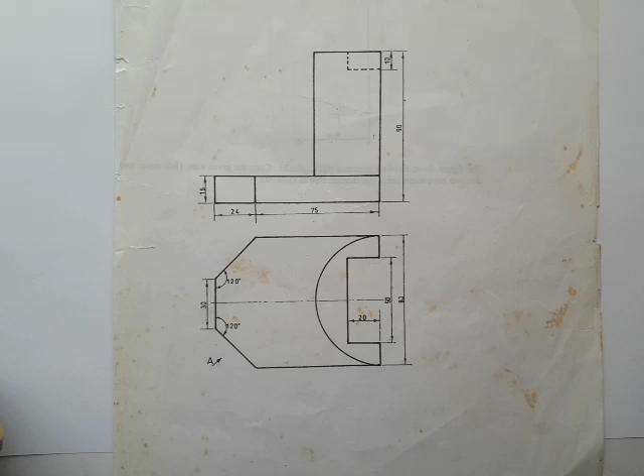Hello guys. Now I found out most students usually have problems with drawing half circles in isometric. In other words, half isometric circles, such as this one. Not just that, especially when the circle is placed at the edge, not at the center or the middle of the drawing. When it is placed at the edge, it becomes a little bit more difficult for students to draw.

But the truth of the matter is, this is very, very easy, and there is no problem at all. So what I'm going to do is to show you how to go about this step by step. However, if you are new to this channel, you might want to go see Introduction to Isometric, because there are some things I explained there in detail that I'm not going to dwell on that much in this video.

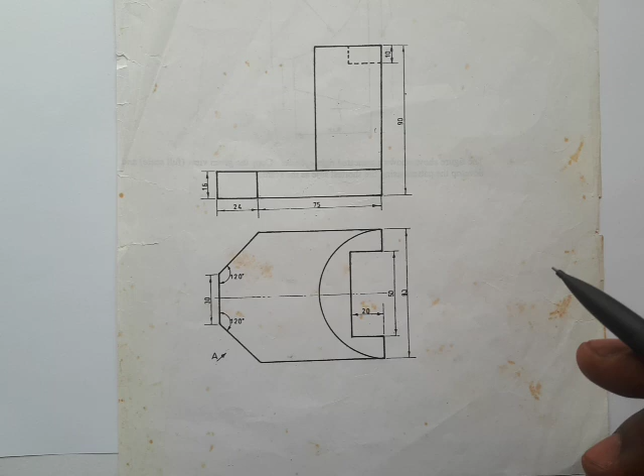Now, if you have checked out my previous video, you will discover that I always use the box method, which happens to be the easiest method to project isometric drawings. So the box method, the process or how you should go about that is you're going to have to look for the total height, the length to the right and the length to the left. Then you project the box with it.

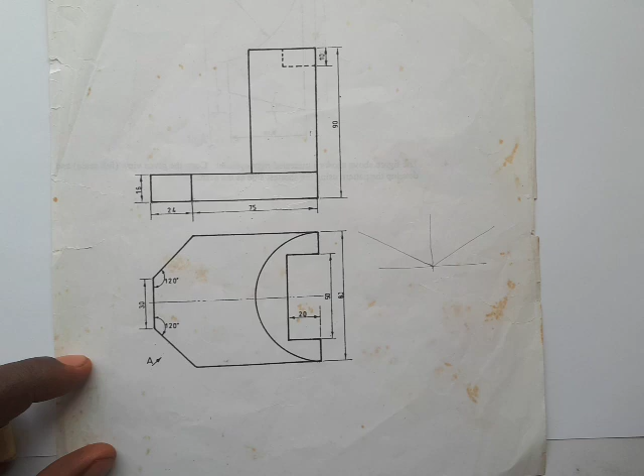What I'm talking about is this. You know, when you're drawing an isometric, you have a horizontal line, you have a vertical line, you have a line receded to the right 30 degrees and another one to the left 30 degrees. By the way, this is an old question I found somewhere and I just decided to share with you. All right, so now you're going to look for the total dimension to the right, total dimension to the left, and the total height. Then you use the whole of that to draw the box that will contain this drawing.

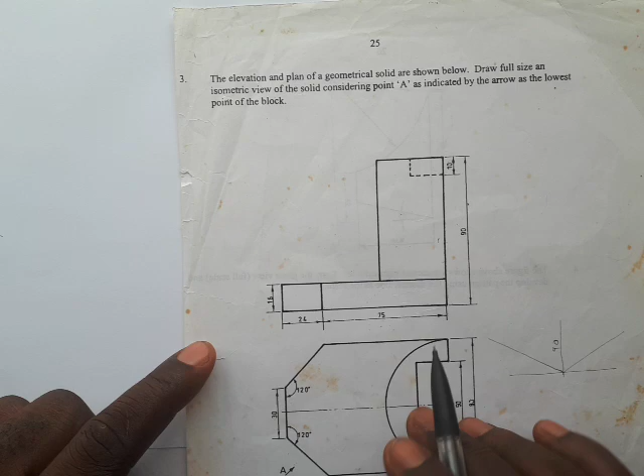Now from this drawing, we could see here that the total height here is 90. So that means this line will be 90. Now let us look at the total length. Remember, we're asked to draw this considering point A, as indicated by the arrow, as the lowest point of the block. All right, so this is going to be the lowest. So from this point to this point here is what is going to take this receding line here.

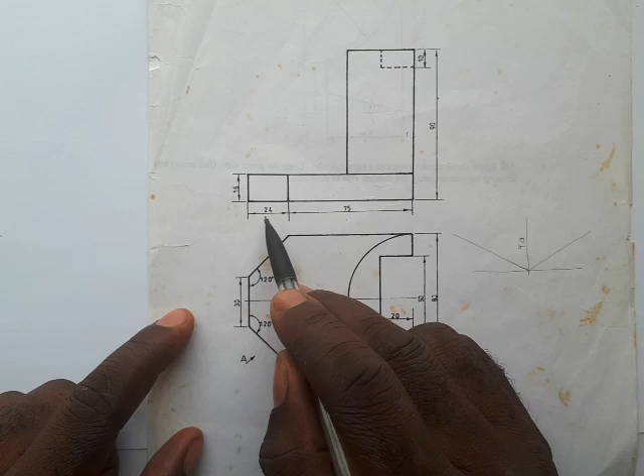So what is the dimension? So from here we have 75 plus 24. That's 99. So this is going to be 99 millimeters. That's 9.9 cm. Then let's find the length to this other side. That would be this length here. So from here we could see that this is 80.

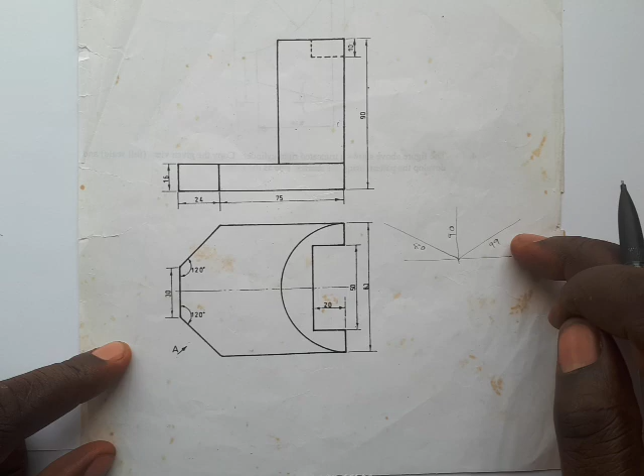So this is 80. So what I want to do is draw a box that is 90 by 99 by 80. So I will do that off recording. And if you want to learn how to do that, go check my previous videos. You will see exactly how to go about that.

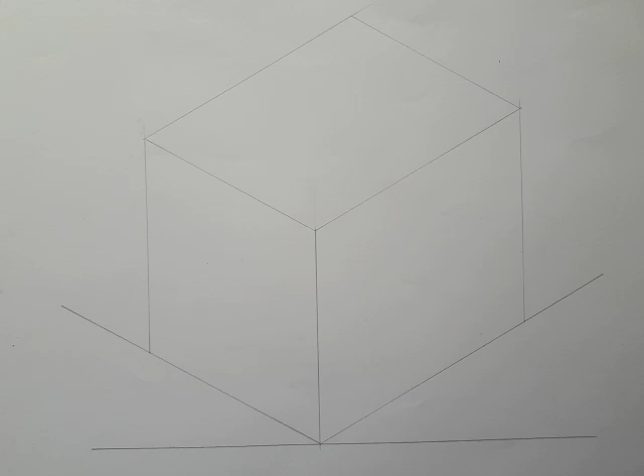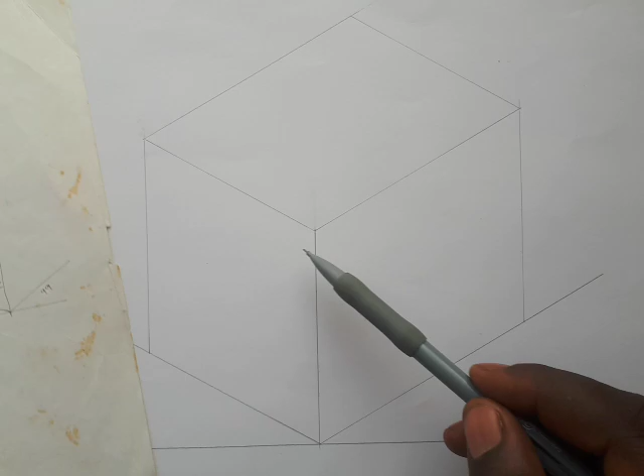Okay, so here we have the isometric box. Remember how I got it. The whole of this height you're looking at, 90. This dimension to the right, all of it 99. And this, all of it to the left, is 80. So I'm just going to project this inside. Now my focus will be more on this area, although I'm going to show you how I got the other part, but I would want you to focus your attention when I get to this area.

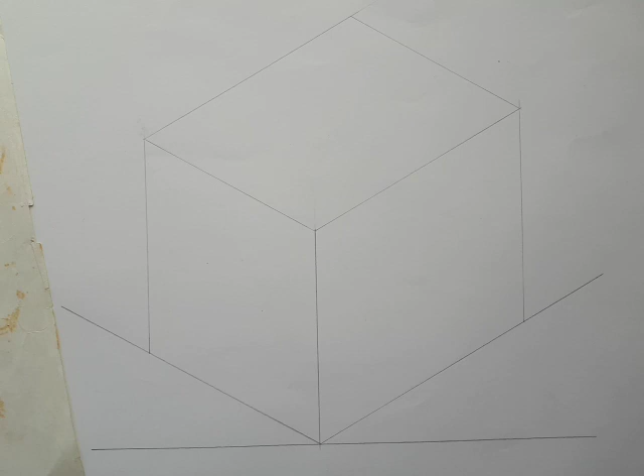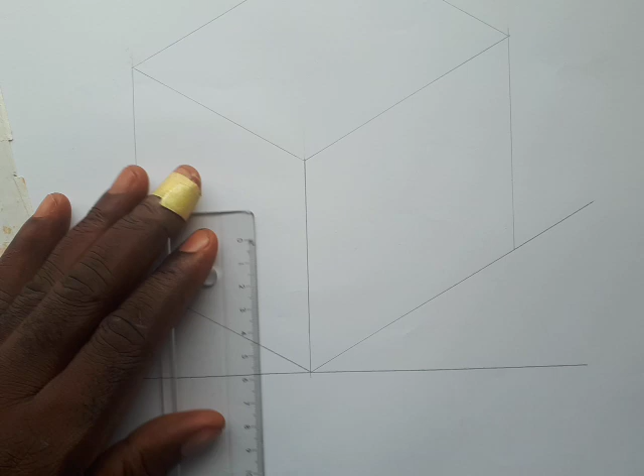Okay, so from here we know the height here, the dimension is 16. So we're going to measure 16 here. I hope you can see that very clearly. Take it up. Okay, so this is 16. This is 5. This is 15, and this is 16. So I'm just going to measure. This is 0. So that's it. So I'm going to transfer.

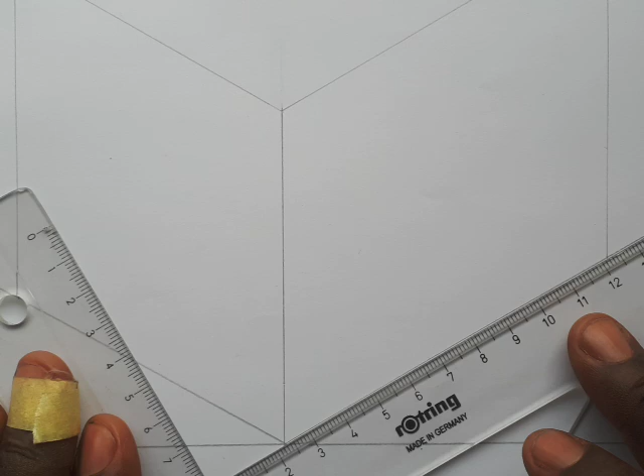Now remember, this box, everything you see here are thin lines, not thick lines. So when you're projecting your box, make sure you use thin lines. All right, so I measured 16 here, so I'm just going to transfer lines from here to where I measured 16 and draw thin, very faint lines, and stop here. Then do the same thing here, transfer lines from here to 16.

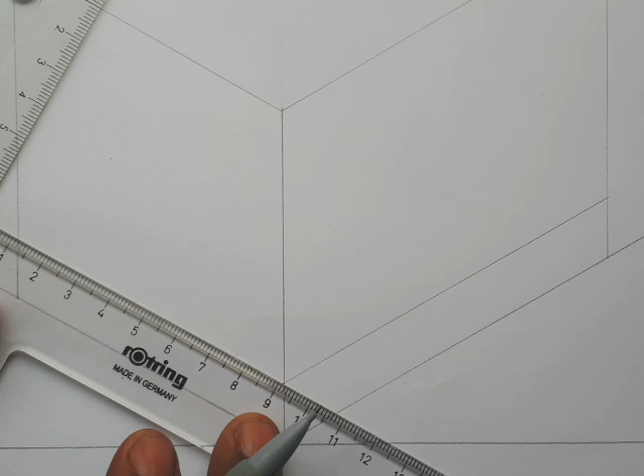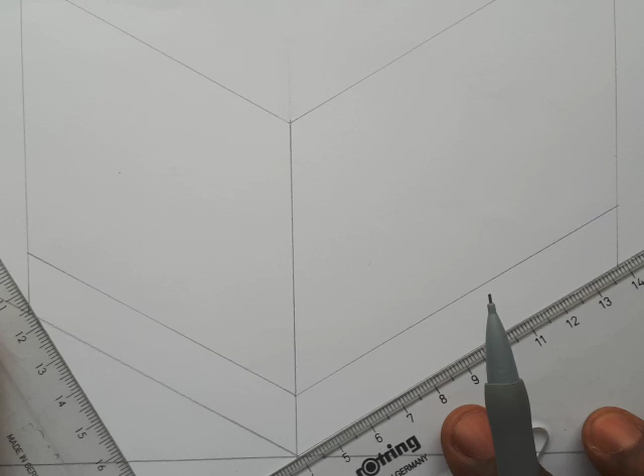This point here, and draw faint lines for now. All right, so now I'm going to transfer this line because I will need the back to project this part. So I'm going to transfer this line here. So align your set square properly and transfer lines to this point here, and draw lines all the way, stop somewhere there.

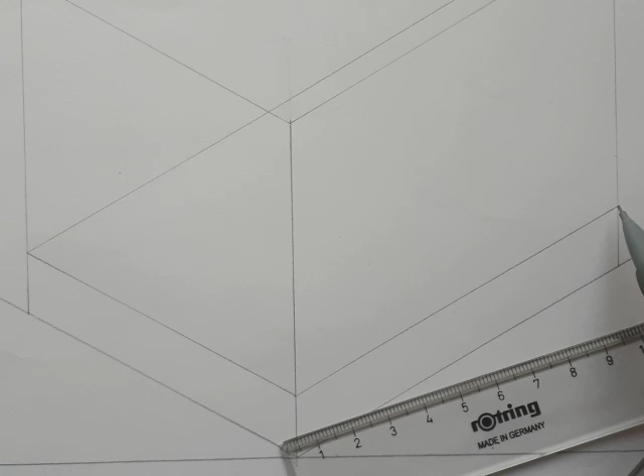And there are two ways you can go about this. You know, this is already 9.9, so it's either you measure 9.9 here, connect it, or just simply transfer this line to this point and connect. I hope that's clear. Thin lines. So align your set square. I'm going to use this method and transfer to this point here and draw thin

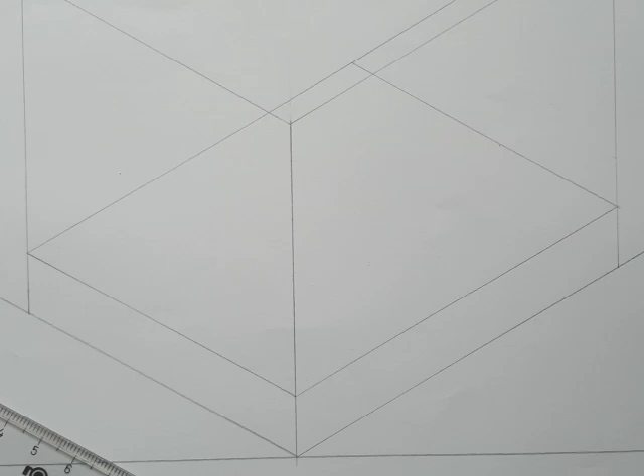lines. Good. Now do not confuse this line with the one on the top. Okay, this is for the top, while this one is for the base. Talking about this part here, this level. All right, so let's move on. Now let me start with this side. Now you see this is half a circle, something like this.

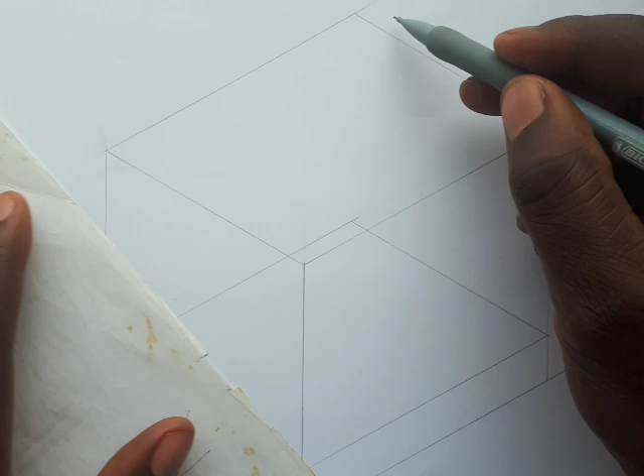Now like I said, go check out previous videos on introduction to isometric. I laid more emphasis on how to draw isometric circles and I explained in detail. However, in order for you to draw a circle in isometric, you need a rhombus. A rhombus is an equivalent of a square when viewed perpendicularly. It's an equivalent of a square.

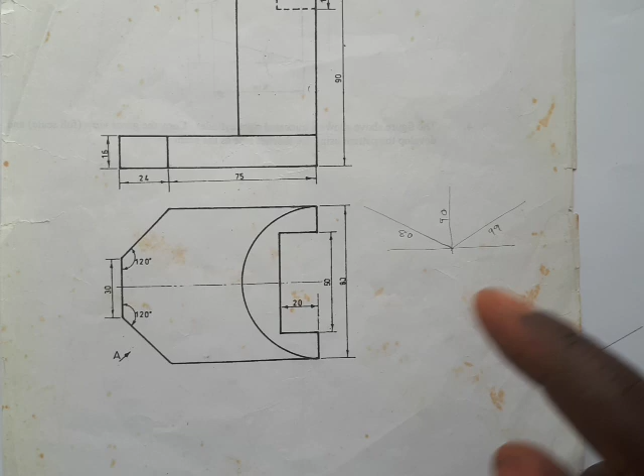So you need a rhombus to draw an isometric circle, just like you might need a square to draw a circle. You don't actually need a square to draw a circle. You can draw a circle with your pair of compasses and all of that, but you could also draw a circle using a square. So you need a rhombus to draw an isometric circle. But in this case, we have half a circle. So you see half of the circle is on this part.

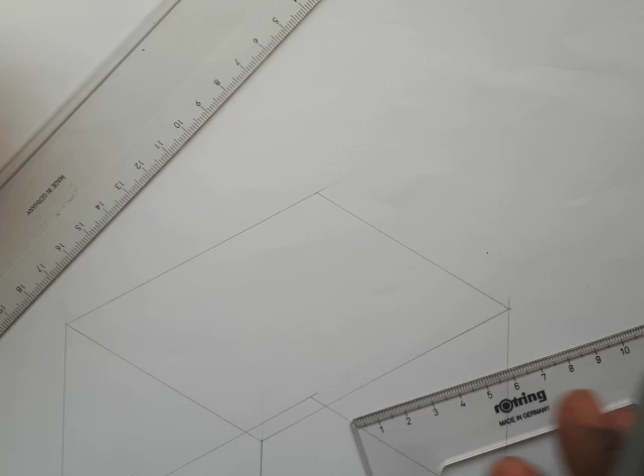Now the question is, how do I draw a rhombus here when I have the circle here? Very simple. You're going to project half length of the rhombus inside the drawing and half length of the rhombus outside. You do it for both the top and the bottom. I hope that's clear. So let us proceed. You're going to extend this line with thin lines a little bit, like this. Extend this line a little bit.

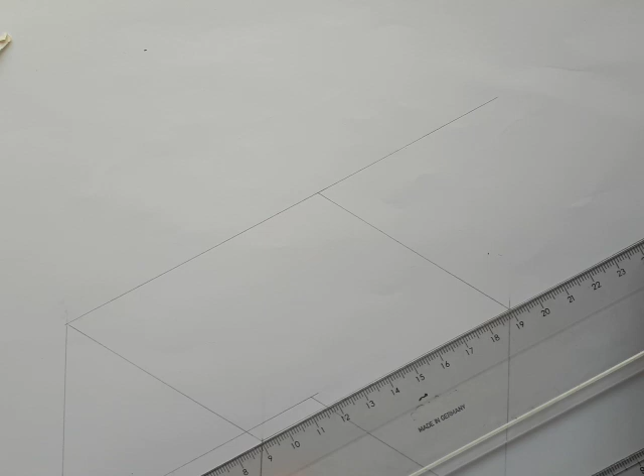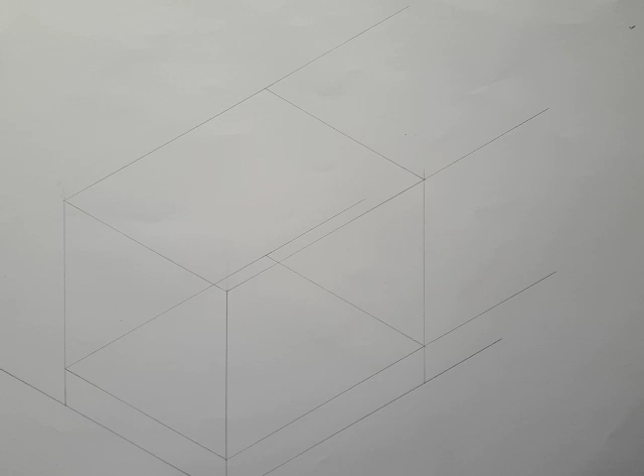All right, just follow me. Now I'm going to do the same as I did for the top for the bottom as well. So I will extend both lines, this line and this line. Now do not forget, these are all thin lines. So I extended this. Take your eyes off this. In fact, let me erase this one so you don't confuse this line, the base and the top.

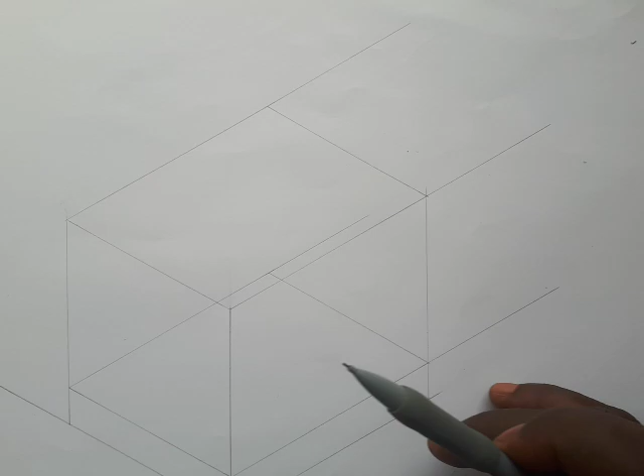Now the question is, what is the diameter of the circle? The diameter is 80, that's this exact size here. So for you to draw a circle of diameter 80, you need a rhombus of 80 by 80. So you're going to draw a rhombus 80, taking here as the center, or rather the diameter of the circle. So the circle is going to go like this. But all we need is half of the circle for the top and half for the bottom. Part of the circle is not going to show up at the bottom. Don't worry, when we get there you will understand.

So if the diameter of the circle is 80 and the length of the rhombus has to be 80, we're going to take 40 to the right and 40 to the left. That would be the measurement, do you understand? So now this is 40 here at the center. I hope you can see this. We have 40 at the center, we have 80 here. So I'm going to needle on 80 and on 0. From this point to this point is 80, this point here being the middle. So I'll do the same thing for the top.

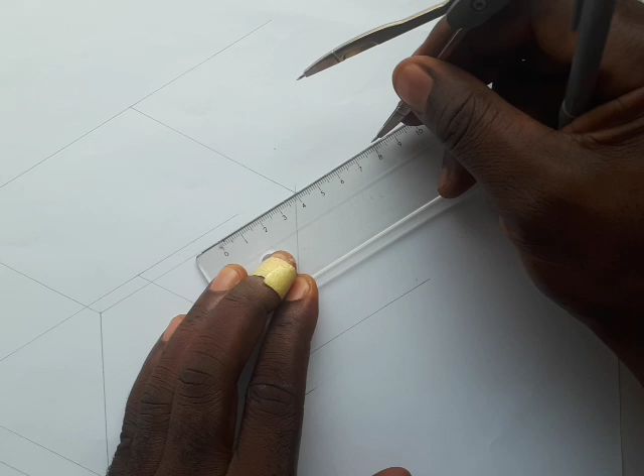Now remember, take your eyes off this line. I'm making use of this one for now. So I'm going to place my 40 at the center there. Measure to the left, that's 0, and to the right, that's 80. 40 being the center. I hope that's clear. We're going to do the same thing for the bottom, but let me finish the top. Now what you're going to do next is transfer lines like this. So align your set square with this line here.

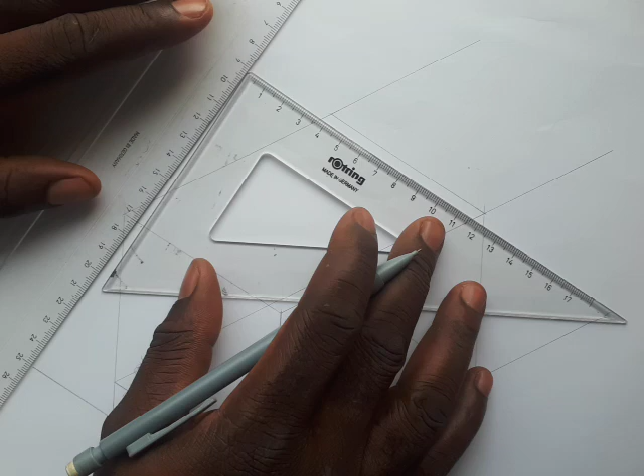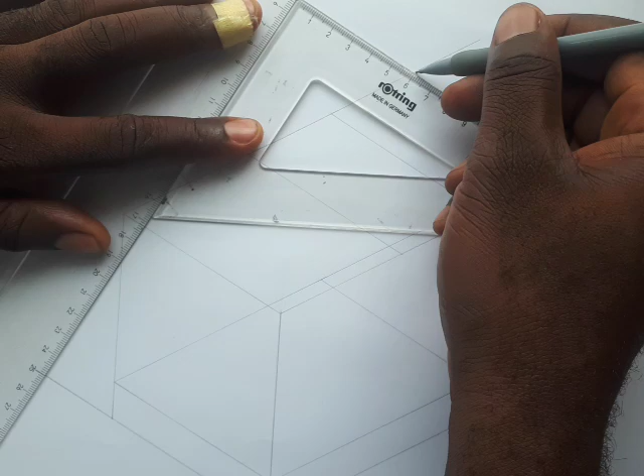Transfer lines to where you measured 40. That's this point here, and draw until it touches this other point here, 40. So there's no point even measuring this 40 here, because once you transfer lines it gives you the same dimension at the end of the day. So transfer to this point here where you measured 80. So that's it. So from here to this point here is 80, and from this point to this point here is 80 for the top.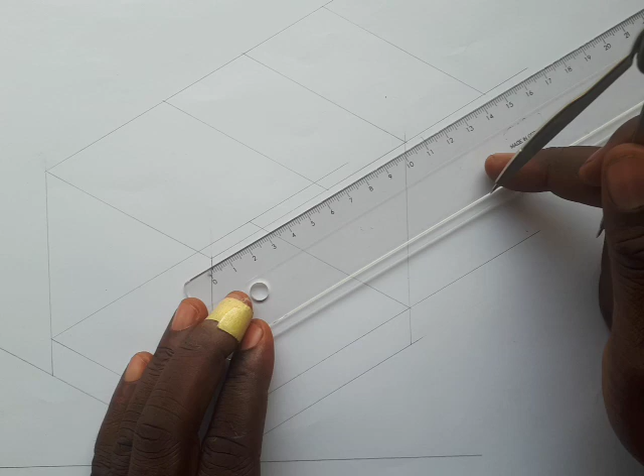Now we're going to do the same thing for the bottom. How? You place your ruler like this. So you measure. This is my 40 at this point here. See this? 40. I'll measure 80. That's my 80, and this is 0. That gives me 80. I hope that's clear. So I'll do the same thing for the bottom, for this other side. So I'm going to place my 40 here. Okay, and this is my 0, 40, and 80.

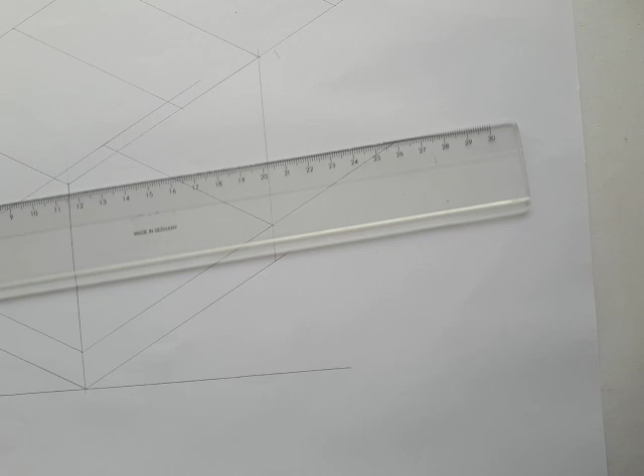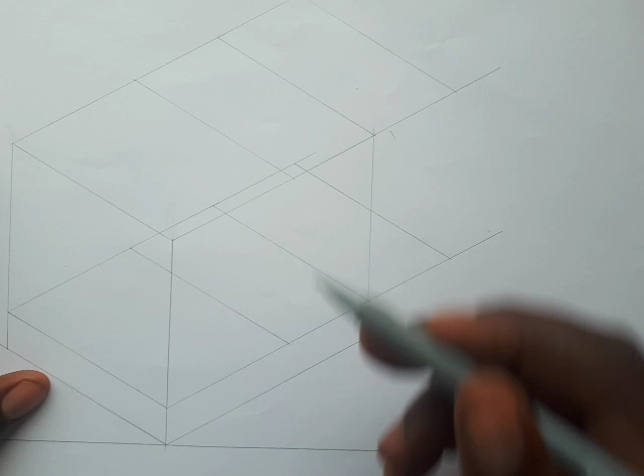All right. So I'm going to connect them. It's either you connect them or you transfer lines, but I just love to transfer my lines. So like I also said, you could measure just one side only. Transfer your lines. It will give you the same thing at the end of the day. So this is my 0, this is my 40, and this is my 80. So I'll transfer lines all the way here. Okay, and that's it. So for clarity purpose, I'm going to erase this extension so you see exactly what's going on here. Okay, so here we go. I hope you haven't blinked just yet.

Just follow me. All right, now let me focus on the top first. Then I'll do the same thing for the bottom. Now you know how to draw an isometric circle, right? So the first thing you do is you draw the what? The diagonal, the longest diagonal. So this is the rhombus. This is the longest diagonal. This is the shortest. Don't join the shortest. Join the what? The longest. So I'm going to connect this with thin lines. I'm still on thin lines to this point here. All right. I'll do the same thing for the bottom. Okay. I hope you haven't taken your eyes off the whole process.

Good. Now, I have located the center of this side 80. You know this is also 80. So what I'm going to do is I'm going to locate the center. I only need half of the circle, so I'm not going to bother myself with the other side because I don't need it. I don't need this side. I don't need to draw the circle out. Just the inside only. So I need to locate the half of this 80 and also the half of this 80. So a simple way to do that, just place your ruler. This should give you 80 on the dot.

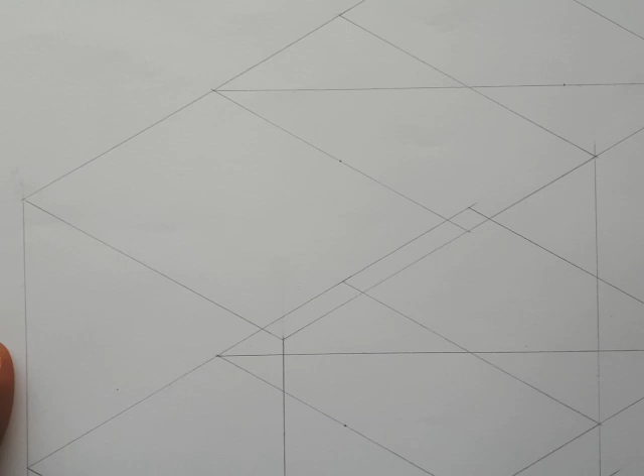And the center is what? 40. So I need this point here. So note it. And also do the same here for the bottom. This is 80. All right. And the middle here is what? 40, dot. And just rest. So let me zoom in a little bit so you see the next step. All right. So what we're going to do next is we'll start drawing the circle.

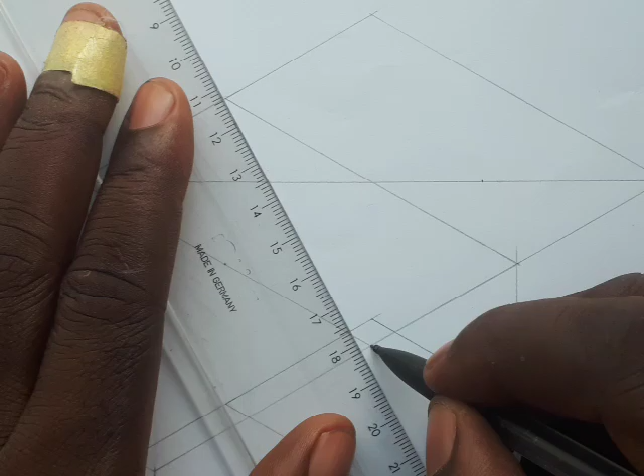Now before we do that, we need to get a point. So you can choose either of these points, this corner here, or this corner here. All right. So what do you do? You connect it to the center where you measured 80. I mean the point 40. What you're actually looking for is a point on this line. So this is how you go about it. So now, please do not confuse this base with the top. Focus on the top. Take your eyes off the base for now. So this is the corner. So connect it to this point here.

All right, but I'm not going to draw the line. If you like, you can draw the line, no problem. But I'm not going to draw the entire line because I don't want this whole drawing to be crowded with lines. So I'm just going to focus on this part. All I need is this point here where it cuts this diagonal. I'm supposed to actually draw this line, but I'm not going to draw the whole of the line. I'm just going to draw this part because this is where I need. All right, okay, that's it.

Now I'll do the same thing for the bottom here. All right, I'm going to connect this to this half. Now do not make the mistake of joining it to this point here, because this is this other side at the back. So you connect it to this side, this point here, but there's no point drawing the entire line. Just cut this line at that point, and that's enough. Now needle here at this point of intersection here, stretch to this point here. Sorry.

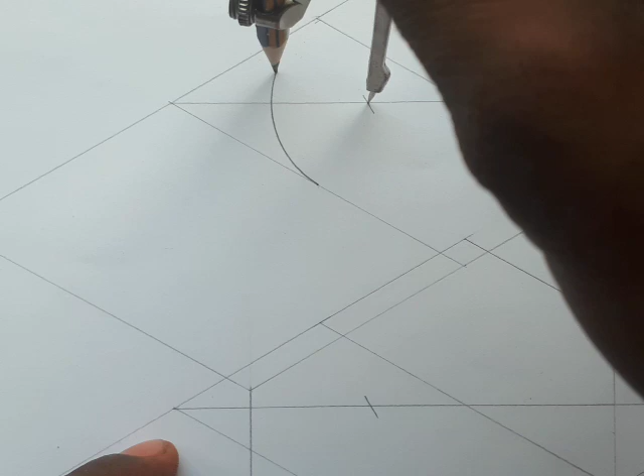Okay, now if it is touching this point, if you have drawn it correctly, it should also touch this point. I hope you can see that. All right, so I'm just going to adjust this properly. So that's just good. Now draw from this point the half to this other half you measured here. Do not exceed these midpoints. So draw a thick line like this. All right, I hope that's clear.

Now look at this base. We'll do the same thing here, but we are going to be very, very careful. So needle at this point. Remember, if it is touching this point here, it should also touch here. But we are only going to stop at the diagonal. We're not going to exceed. Why? Because by the time we are turning, that will be the back of this drawing. This is not a transparent object. It's an opaque object. So we're just going to stop here because we don't need hidden details. You don't draw hidden details in isometric except you are told to do so, but actually you shouldn't do that.

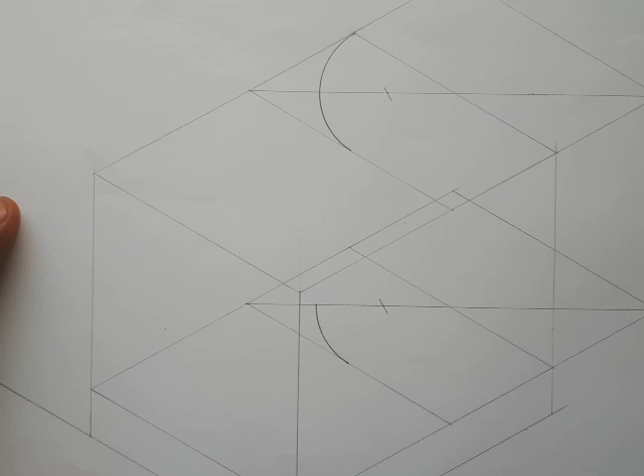So you draw lines from here, arc from here, and stop at this diagonal here. Just stop there. Thick line, stop there. All right, now needle here, this point here, and stretch to this point half, or this other point here half. Okay, so that's it. Now if it is touching that point, it should also touch this point. You see, so you draw lines from here and stop here. Do not exceed the half. Thick lines or thick arcs like that. You see that?

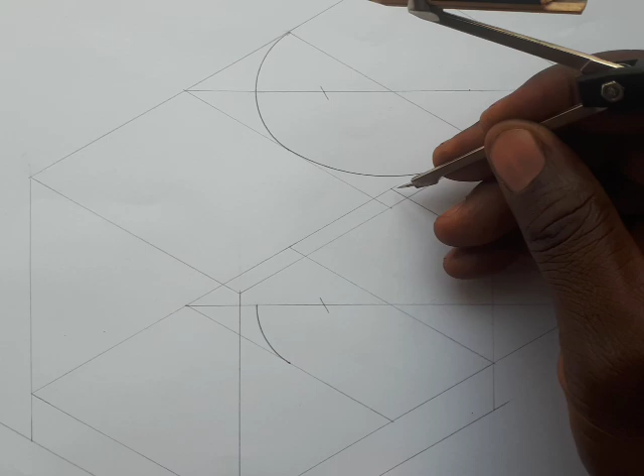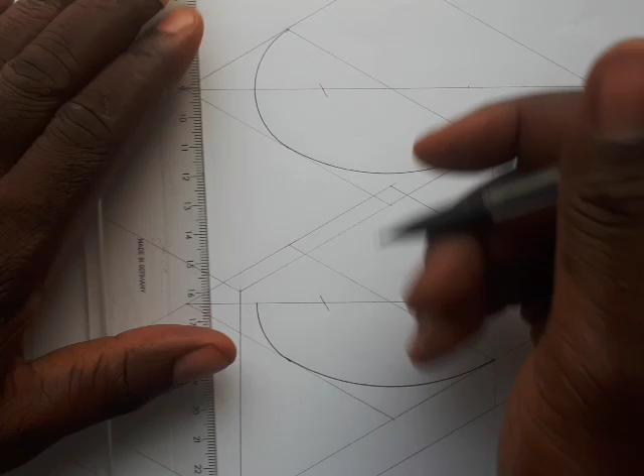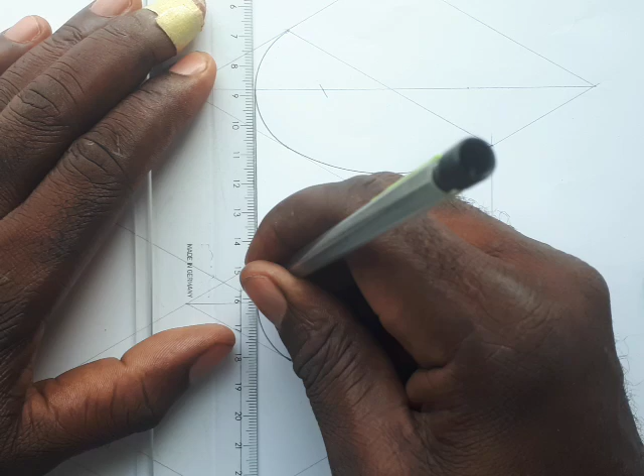All right, now you do the same thing for the bottom. So you needle here. Remember, once again, don't make the mistake of pointing your pair of compasses at this. Don't needle here or this point. It is this point here. You stretch to this point. It should be there already. Now if it is touching that half, it should also touch this half here. So draw the other one with thick arcs like this. Okay, that's it. Now connect this point of intersection with the diagonal with this point of intersection with the diagonal with thick lines. So that's it. We move.

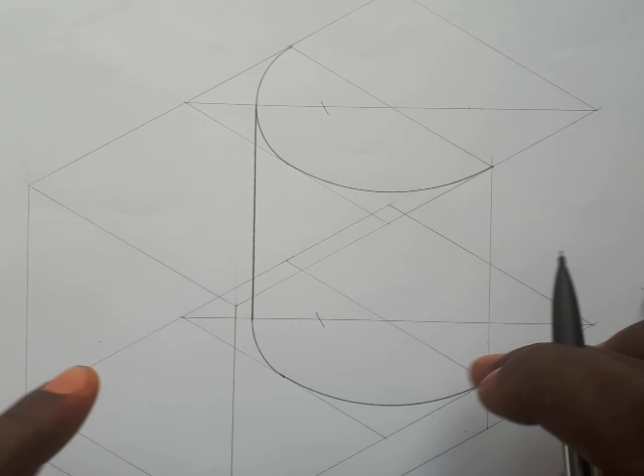Now we're done with the most difficult part, because this part is quite technical, but you can see that it is very, very easy. All right, so let's now complete this part. Now there is something wrong with this drawing. This is actually a NECO question, one of the Nigerian examinations. Looking at this drawing, you can see a hidden detail here, right? What this hidden detail is telling me is that there is an opening here, and this opening has a floor, like a leveled ground here.

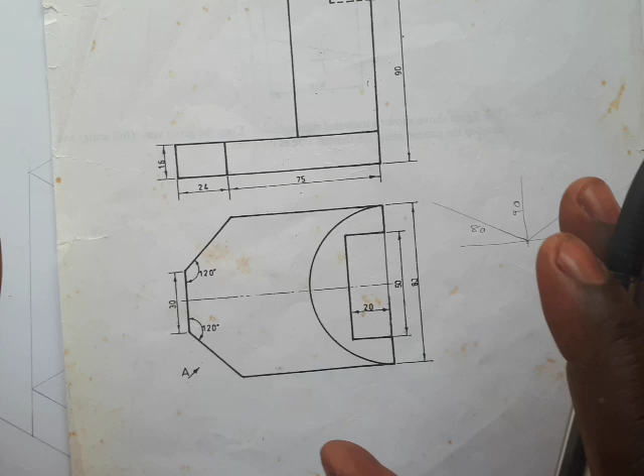So if that's true, it means there's supposed to be a line here. So this drawing wasn't complete, so I'm just going to complete the drawing by adding that line. Actually, it was omitted. All right, so this is how it should look. This is the right plan. So how do I know that? It's because of this part here. Okay, now let us draw this part.

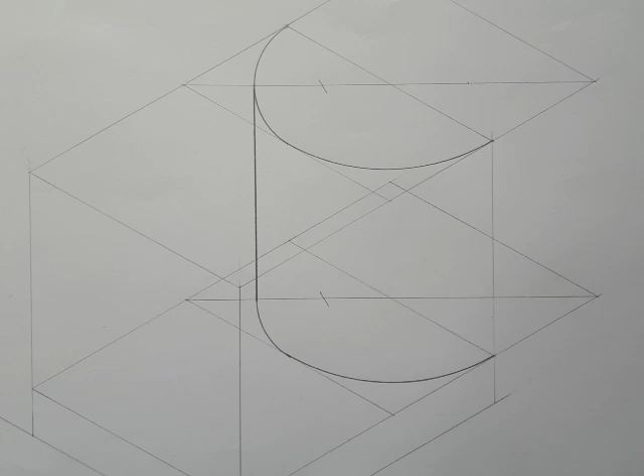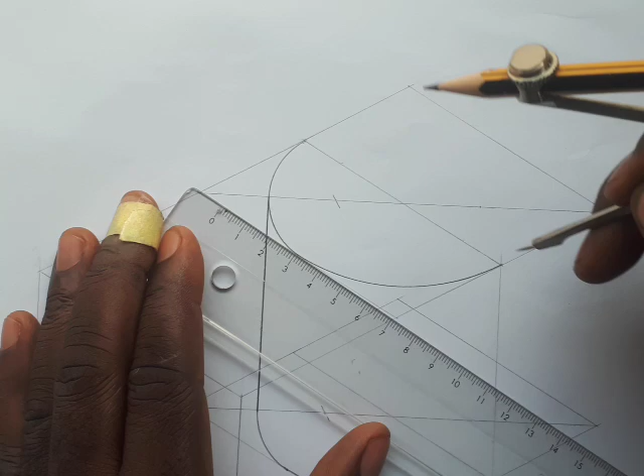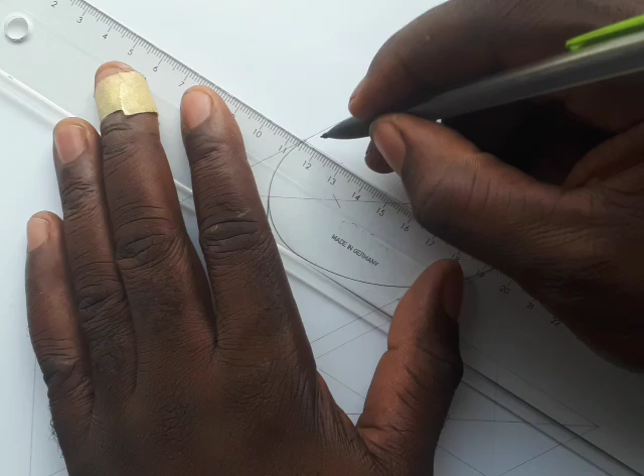Now from here, what do we have as a dimension? You know the entire thing is 80. If you take 50 off 80, you have 30 left. So that means this part here is 15, and this part is 15. That's 30. Okay, so you measure 15. Place your ruler like this. Let me take this as my 0. So this is 1 and this is 1.5. That's 15. So from this point to this point is 15, and from this point to this point is 15. So I am going to draw them with thick lines. 15 here and 15 here. I hope that's clear.

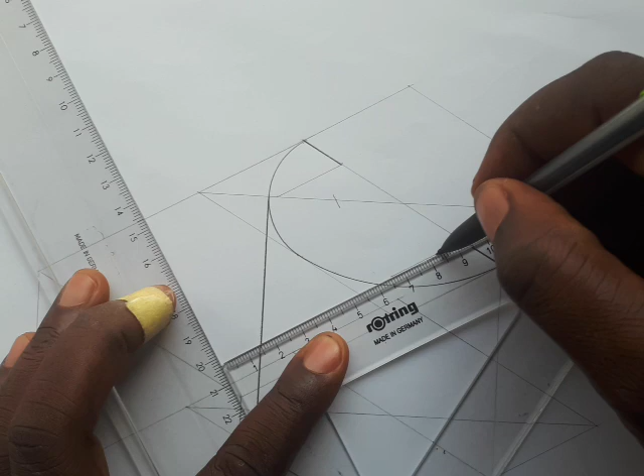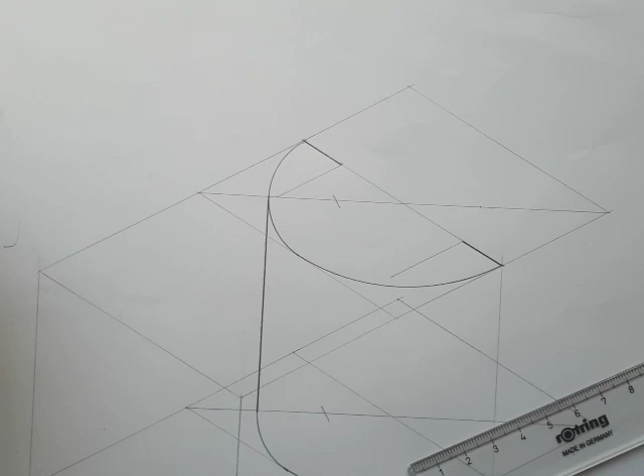The next thing is you transfer lines. So align your set square with this line here and transfer lines to this point 15 here. Draw thin lines for now. Draw thin lines there and thin lines here. I'm going to make them thick later after the measurement. All right, so what is the dimension here? This is 20. So I'm going to measure 20. I don't need to measure on both sides. I can just measure on one and transfer the line. So measure 20 here. So this is 1, 2, 20. For clarity purpose, let me just draw it. Thick lines.

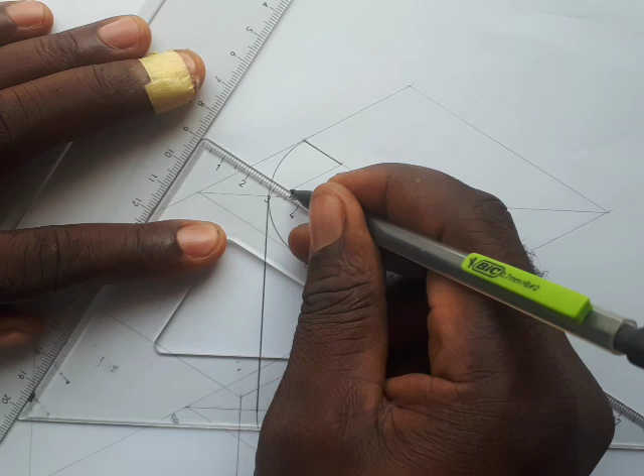So that's 20. So what I'm going to do is transfer lines from here. Align your set square very well. Transfer it to where you measured 20. Then I will draw it until it cuts this other line. Thick line at once. Okay, so that's it. Alright, so I'm going to print this part. Now, like I said, there is a bottom part here. So let's fix that. This dimension here is 10. So I'm going to first of all transfer a vertical line to this point here, a thin line. Let me do that again.

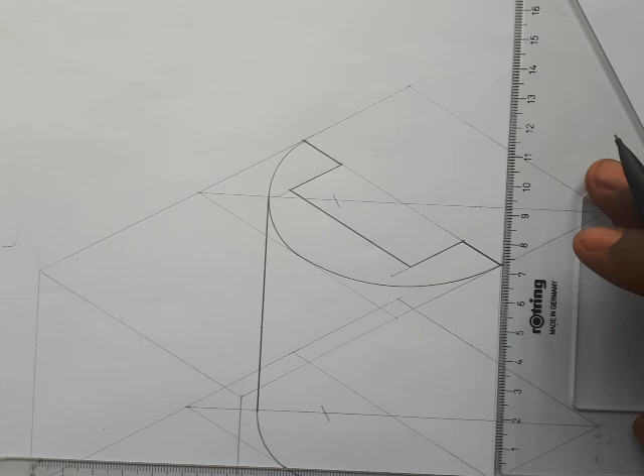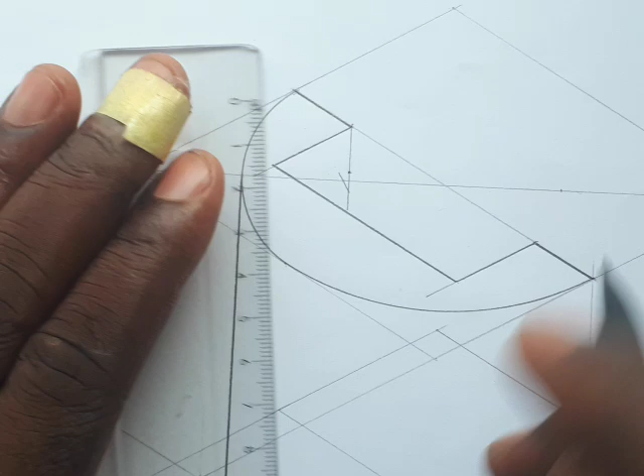Okay, so transfer a vertical line here and draw it down, a thin line. Draw it down like this. Okay. Now what I'm going to do next is I'm going to measure what? 10 on it, because I have it as 10. So you measure 10 on it. That's 1 cm. So that's 10. Okay. Once you're done with that, you can erase the extension. Be careful so you don't, sorry about that. You can erase the extension a little bit.

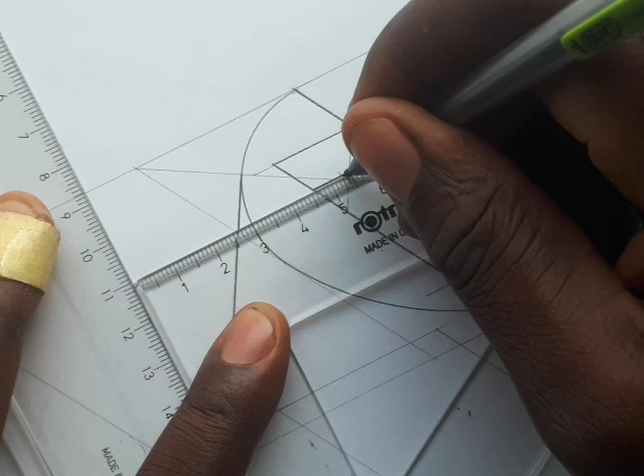Okay, so I'm going to align my set square with this part and transfer to this point here where I measured 10. Okay, and I'll draw until it touches this part here, because like I said, the object is opaque, you can't see the inside. All right, then I will transfer lines from here. Align your set square like this, transfer to this point here, and draw until it touches this point here. Okay, so that's it. Then print this part. So we're done with this part.

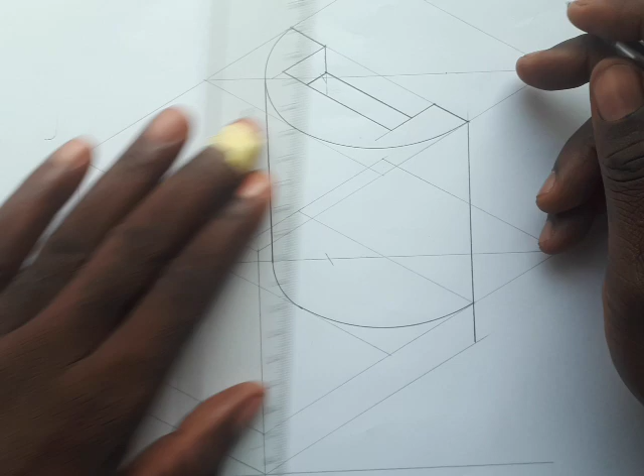All right, so the next thing we're going to do now is let's draw this one, thick lines all the way down. That's thick lines. Now the next thing I'm going to do now is this other part. Very, very easy. Let's fix this other part. We're done with the main part. All right, now do not erase your thin lines, your construction lines. You leave them on the drawing.

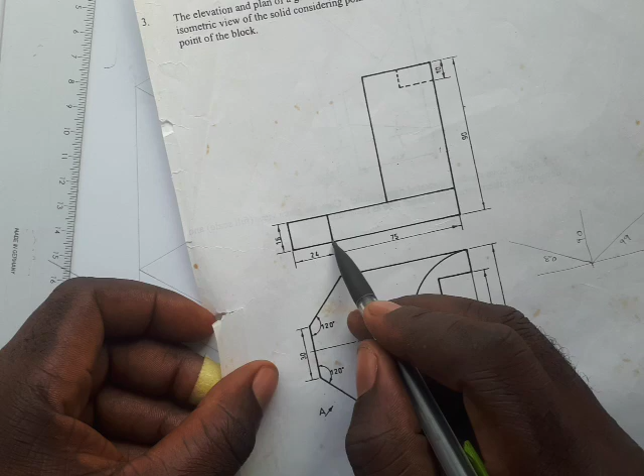All right, so now here we have 75. Okay, now this is 24, but this length you are seeing is not the true length of this drawing. Why? Because from the plan this is off isometric. It's not aligned with any of the main isometric axes. Do you understand? Any of the isometric axes. So that's why it's not the true length. Okay, but we are just going to focus on 75. So you measure 75 here.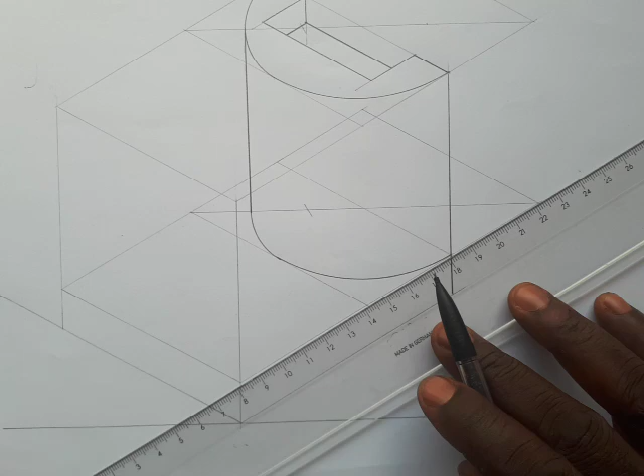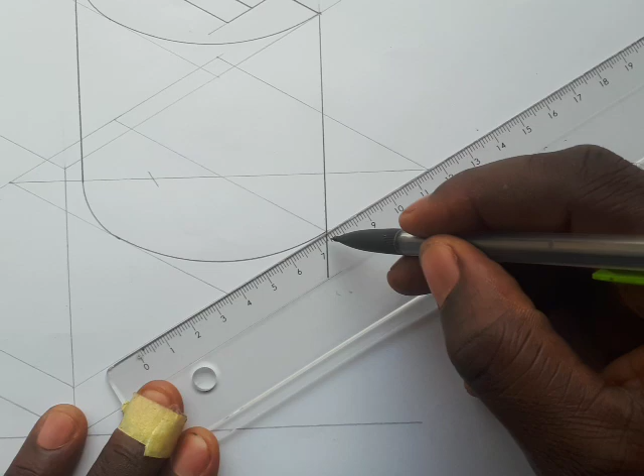Okay, so I have my 75 here. So this is 75. Okay, and this is 0. So I'll dot 0. That's 75. Okay, now I don't need to measure 75 at the bottom. That's just enough. I'll just transfer lines to get the other part. So let me do that just quickly. So align your set square with a vertical line. Transfer lines to this 75 and draw down thick lines at once. Then connect this part, print it out, and print this one as well.

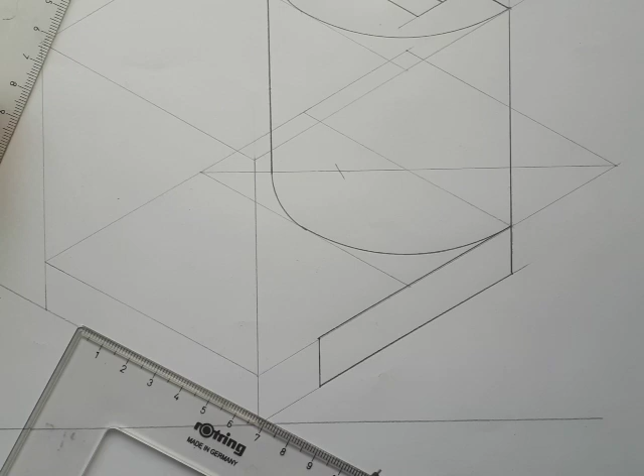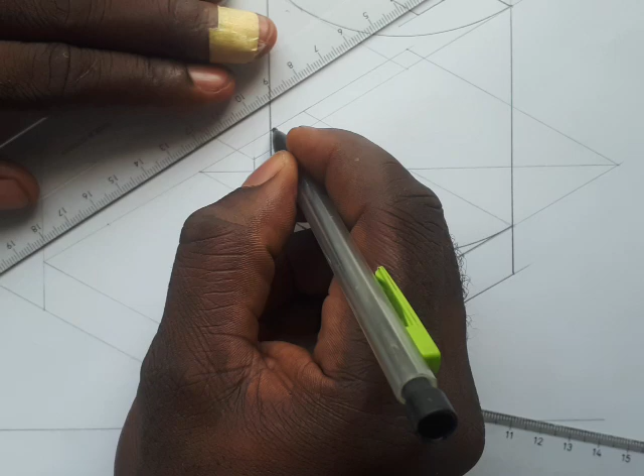Okay, so let's fix the other part. Now I'm also supposed to measure 75 here, but no point doing that. What I'll just do is I will transfer this line to this point here. So this point corresponds with this other side, and I'll just take note of it. So from here to this point is already 75. So I'm going to draw from here. Remember, you can't draw inside because the object is opaque. And stop at 75 here. Stop at this point.

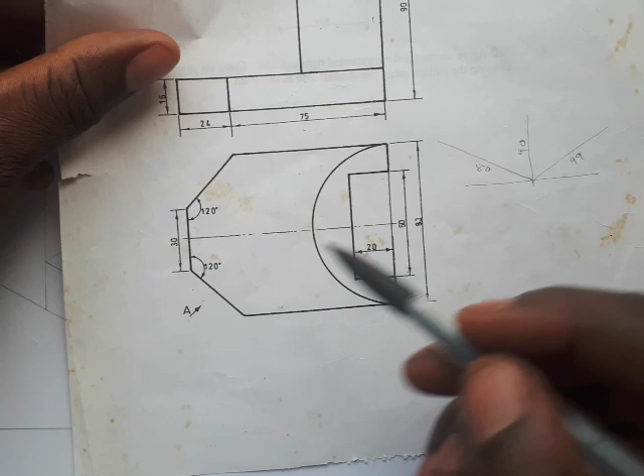Okay, so now let's fix this other part here. Now what do you have here? You have here as 30. Now remember this is 80 on this side. So if I'm taking 30 off 80, I will be left with what? 50, right? So if I'm left with 50, that means if I were to extend this line and join this, this one is 25. If I were to extend this and join this, this is 25. So I'm going to measure 25 from here to this point, and measure 25 from here to this point. So I will be left with 30 here.

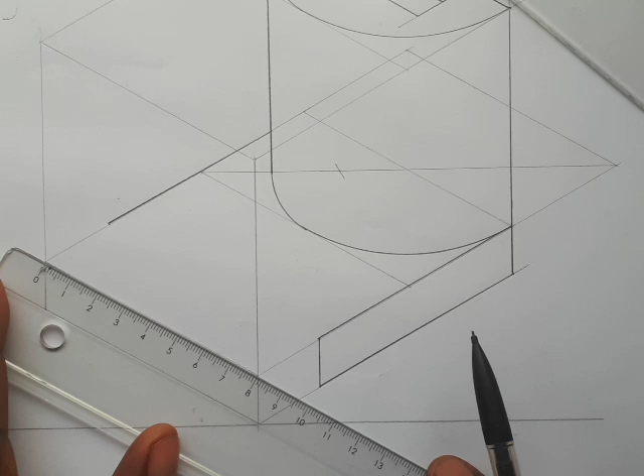All right, so place your ruler like this. I hope you can see that clearly. So this is 2.5 here, and from here this is 2.5 here. That's it. So I'm going to connect this to this point here. Thick lines. I'm going to connect this to this point here. Thick lines, and you print this part. Thick lines.

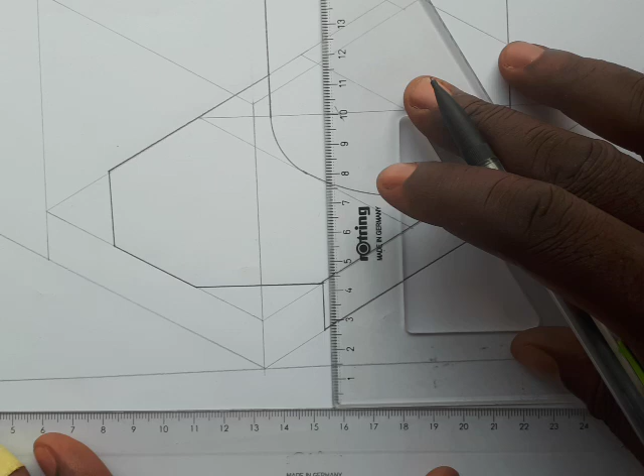Now, before you do that, we'll transfer a vertical line here. So align with a vertical line. Okay, and transfer lines here. You draw lines. Transfer lines here. And you draw this line. So you connect this line by drawing a thick line, and you connect this one by drawing a thick line. So this is the drawing, done and dusted.

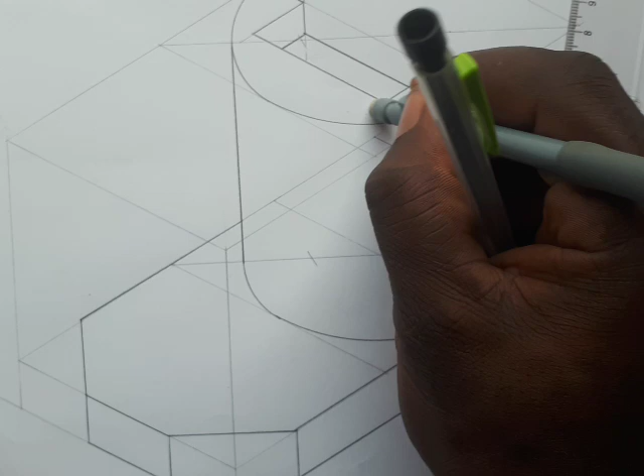Very, very easy. If you didn't get it the first time, start all over again and follow the steps. You'll get it. So the next thing I'm going to do now is I will dimension the entire drawing. Okay, so this is how you pull off drawings like this, like a boss. You know what I'm saying? Okay, so you just dimension and you're done with it.